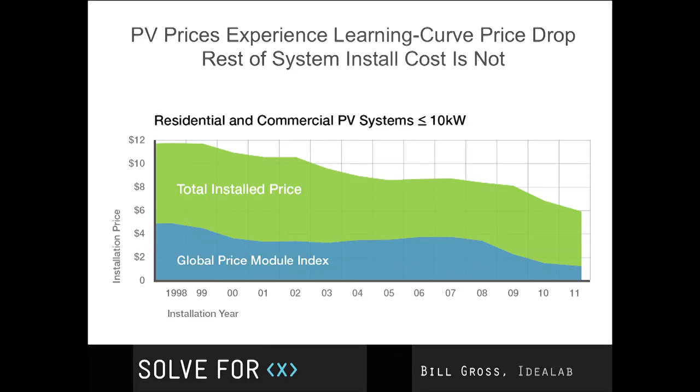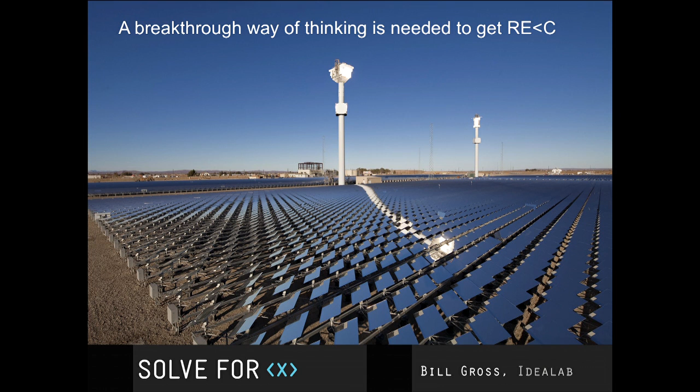This is one example of a plant that does that, and breakthrough thinking is going to be needed to get the price another factor of 3 lower so you can compete with fossil fuels with no subsidies. And I wanted to give you some sense of why it's so difficult.

In the past, 20 years ago, 30 years ago, people made these huge heliostat tower mirrors. And a number of companies recently, BrightSource, eSolar, and others, have broken up those large mirrors into smaller mirrors and put more computer control and less mass. And that has lowered the price, but still not nearly enough.

The cost per square meter of installing these systems is still in the $100 to $200 per square meter range. Even though the mirror itself only costs $18, by the time you do everything else to track it and mount it and install it, you end up costing well over $100 a square meter. You have to have rows of racks of steel to hold them all in place. You need that kind of structure.

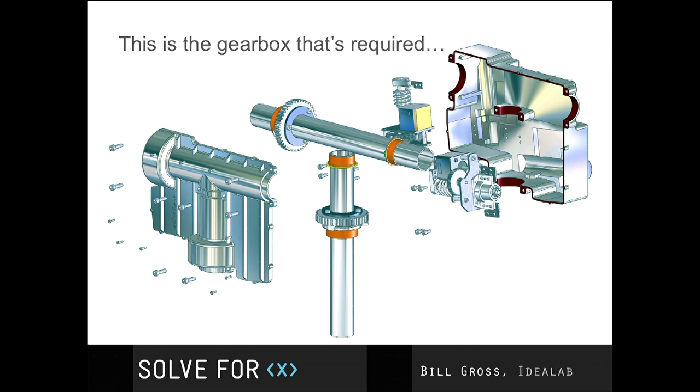You need a gearbox to hold it and actuate it. You need to actuate it accurate to about 1/10 of a degree. And one of the very expensive parts, believe it or not, is this final gear. The final gear in the gearbox has to hold all the torque load of the wind. Because if one tooth breaks off that gear, your system is shot.

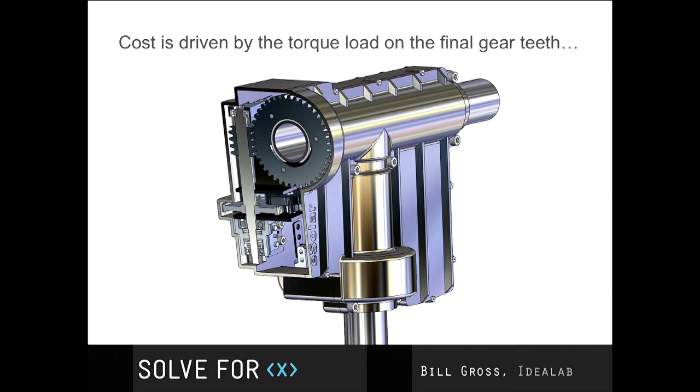So you have to build for the 100 mile per hour outlier wind case. And no matter what you do, whatever size mirror you make, even as you make it smaller, this ends up being quite expensive to control and track those mirrors.

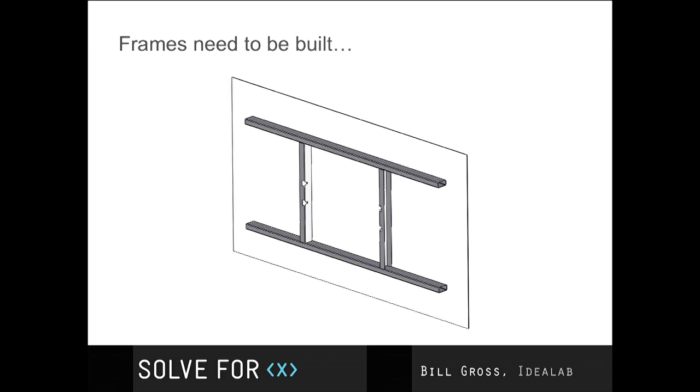And then you need to support the mirrors. You need some kind of metal to hold them in shape. Whether they're curved or flat, you still need to support them like that. And you need to make frames behind them. And then you need to build the whole power block. The whole power plant needs a power block and cooling towers and all the other stuff that goes along with it. And all of this requires lots of construction and crews. And all of those things end up blowing your price.

And I alone, just from some companies that I started, have invested over $200 million in the last 10 years trying to drive the price down. I think people in the room here have invested more than $1 billion trying to do it. And around the world, many billions of dollars have been tried to get the price down to fossil fuels, and we're just not there. So if we're not there with that, how are we going to get there?

Well, first let me tell you about how long I've had this passion. When I was 14 years old, I grew up in the San Fernando Valley. It was the year 1973 when the energy crisis struck. And there were odd and even number days. You had to buy gasoline, $5 rationing of gasoline in California. And I just started reading Popular Science and any magazine I could about what was happening in the world of energy and what could be done.

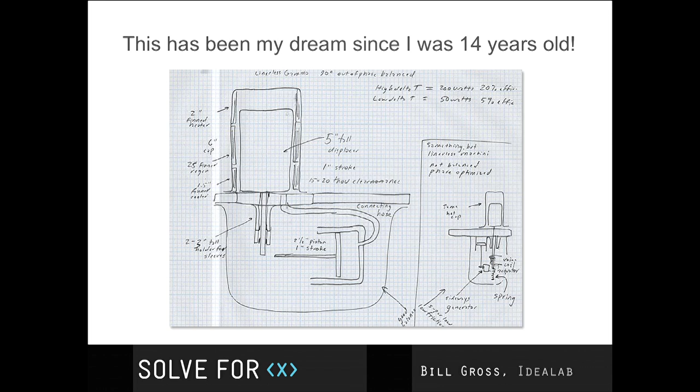And I started sketching little Stirling engines and other things I could do to convert sunlight to electricity. And I made my first Stirling engine in metal shop in high school. And then I started making little parabolic dishes for them. And I even started selling plans for them. I made a little booklet called The Parabola and how to concentrate solar energy with a parabola. And I copied these at Kinko's, and I sold these plans for $4 in the back of Popular Science magazine.

I ended up selling 10,000 copies of these plans, which helped me pay my way through Caltech. In fact, I think I might even have gotten accepted to Caltech because I was doing this at the time. So this had a huge influence on me when I was young, and that's why I was so passionate about it, but still not able to get down near the price of fossil fuels.

So I think we need a moonshot for cost reduction. We need some really radical out-of-the-box thinking to get the price down. And for the last year, I was trying to think of what areas we need to apply that type of moonshot thinking, and I've outlined these areas. We need to rethink storage. And I say this because when you're making a solar plant, and it's only going to run for 6 hours a day, you can't afford the capex of that thing sitting idle for the other 18 hours. And that's been a real killer in getting the price down. So if we can come up with cheap enough storage so the plant can run around the clock, that would be an important breakthrough to get the price down.

We need to rethink the engine. After building these power plants with big power blocks from GE and from Siemens and all the construction costs to do that, we need to come up with something that's much more modular, much more install it and forget it, that can run for 20 years with no maintenance, something that requires no water. We have to be able to put these things where there is no water, so we really need to rethink how we do the energy conversion.

We need to rethink the actuation. If we're going to move something, we need to rethink how we can move it dramatically cheaper. And then finally, we need to rethink the installation. We can't have these construction crews out there in fields. If we want to build gigawatts and terawatts of power, we can't do it with these one-off construction and engineering projects. You're never going to get the price low enough because the capex of a solar plant is 95% of the cost of its operation over 20 years. The capex of a fossil fuel plant is only about 5 or 10%.

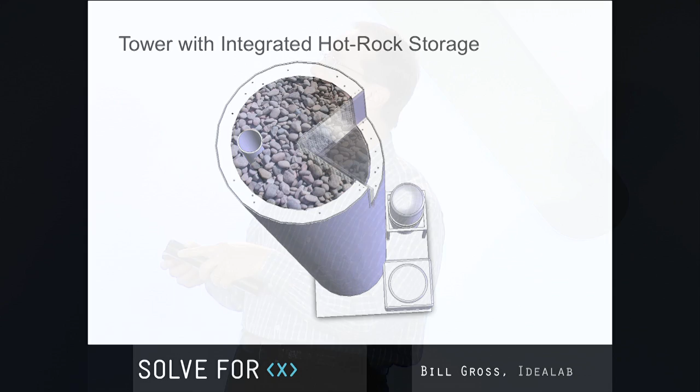The first idea that we've come up with, but there are many others, is to come up with a form of storage which is integrated rock storage right in the tower. So what we do is we put rocks in the tower. Rocks are as cheap as you can get. They're $20 a ton. They're basically as cheap as dirt because they are dirt. And you fill the tower with rocks. You heat the rocks during the day, and the power plant will run for the 18 hours at night.

You can recover the heat. You can have insulation around it, so you only lose 1% per day. And this will allow you to produce power on cloudy days, and even a week later with only 7% loss. So I think rock storage is one example of a very, very cost-effective way to all of a sudden get a 24-hour plant.

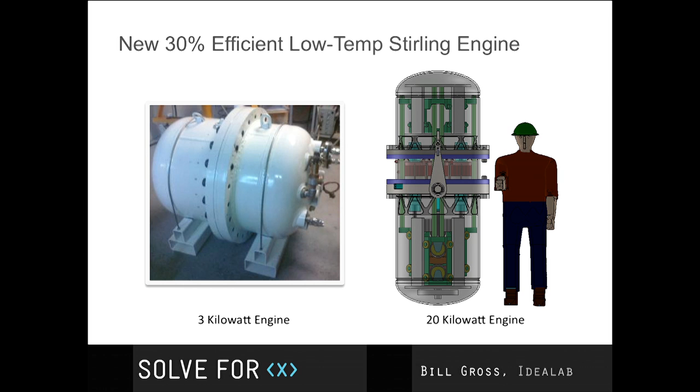Second, this new modular engine, a Stirling engine as an example, that can be put at the base of each tower and just produces electricity. That way you don't have to pump anything around the field. You don't have to pump hot fluids. You don't have to pump oil, molten salt, anything. You just pump electrons. You have to make solar more like a wind farm, where at the base of each tower, there's a wire that comes off with electricity, and not where you have to pump expensive or hot things around a field to bring them to a centralized turbine.

Next, and this might be the biggest breakthrough, we need more thinking around this area, and it's this. The realization that when you're trying to concentrate sunlight, you're really just bending photons, weightless photons, and yet you're building this strong structure, and I explained to you the heavy-duty gear you need to make to be able to resist the 100-mile-an-hour wind. Well, one idea we came up with in the last year to try and break through away from that is to make a retractable pool cover solar field.

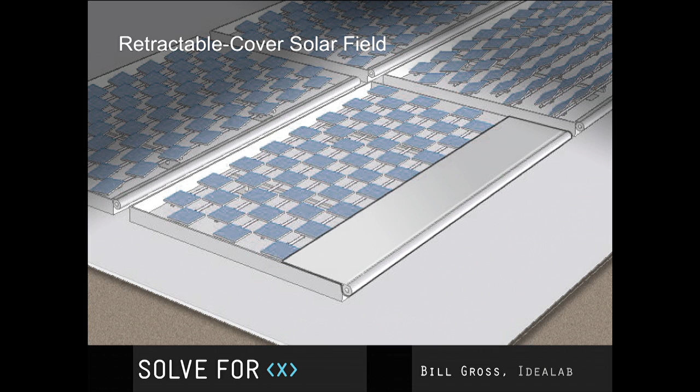What you do is, as soon as the wind is above 25 miles an hour, you just cover the field. And all of a sudden, everything you put below the cover can now be very lightweight. You don't need nearly as much metal. The actuation can be very delicate and wire drive. You can actually actuate the mirrors almost like a marionette with very delicate stainless steel cables. All these things can dramatically reduce the cost of the field because now you're no longer fighting the elements, you're just hiding from the elements.

And in wind power, wind is your friend. In solar power, wind is your enemy. And most of the cost of the solar field is going to resisting the wind. And that can be simply avoided by just hiding or covering the field. But why don't you just keep it covered all the time with clear cover? You could use a clear cover. That would be a possibility.

You would lose 8% of the light going through the cover and 8% coming back through, and that might be a possibility as well. But the basic idea of not fighting the wind and making something very delicate just to bend the photons, I think it's a huge new movement, and I think something like that is what's going to be needed to get the price where you need to go.

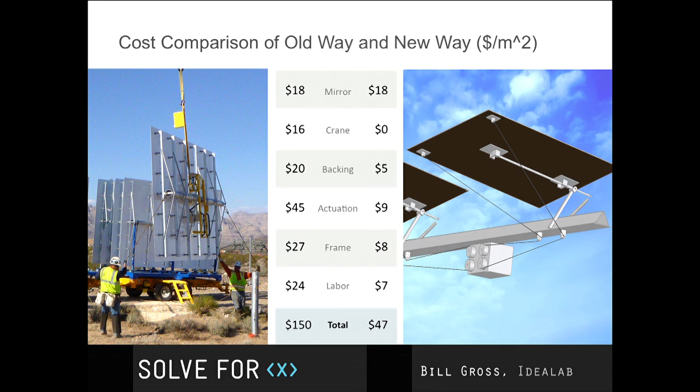And of course, as you said, if the mirror's underneath glass, the mirror doesn't need any steel in the back of it anymore. So you save all of that cost. The actuation goes from $45 a square meter down to $9. The metal frame that goes in the ground goes from 27 down to 8. The labor goes from 24 down to 7. And you're down from $150 a square meter, basically, to 47. And at 47, you can finally get to that price.

Where all this leads, when you add it all up, is with these kinds of moonshot thinking and many more, and I hope this will inspire more conversations while we're here, you can actually get to 4.9 cents a kilowatt hour. 4.9 cents a kilowatt hour with no subsidy whatsoever. And I still think there would be subsidies. There might be some price of carbon. There might be some other government help.

But here you can actually produce solar power and put it in the grid and lower people's energy bills, not have to go to the public utilities commission and try and get them to get approval to raise people's energy bills. Once you can lower people's energy bills with solar, I think it'll take off like crazy. And I'm really, really anxious about making something like this happen in the world.

But after a decade of frustration of trying to do it, I feel the only way to get there is to win on price. We're not going to win by winning people's hearts. We're only going to win by beating the price. And I think moonshot thinking is going to be required to get there.